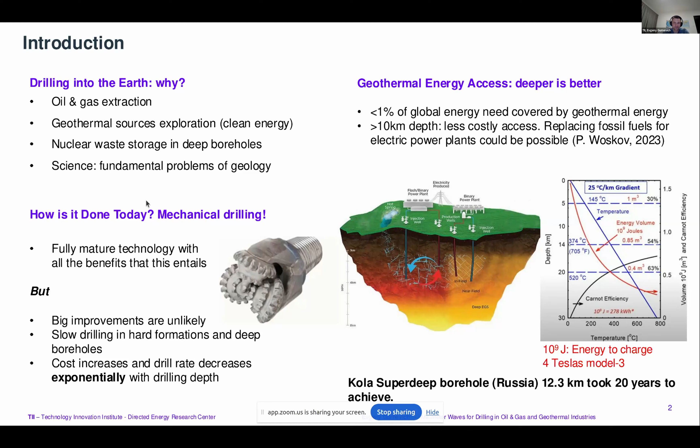One of the alternative technologies is millimeter wave drilling. Let's start from the basic physical principle. Millimeter waves are a part of the electromagnetic spectrum with frequencies, let's say, from 30 to 300 gigahertz. It has been experimentally shown that these waves are well absorbed in rocks, both granite and basalt, causing their strong heating up to the melting point and even evaporation. At the same time, unlike laser radiation, millimeter waves are weakly sensitive to the presence of dust in the air and can propagate with weak attenuation over long distances.

Additionally, taking into account the well-developed technological basis, here we need to say thank you to researchers working on thermonuclear fusion, because the most powerful millimeter wave sources are developed and used now for heating thermonuclear plasma.

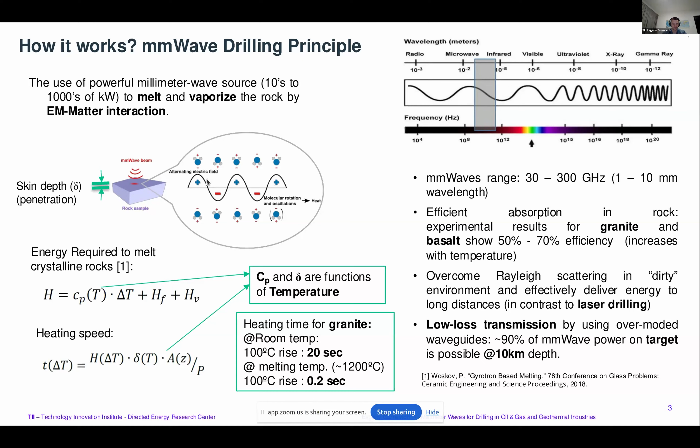So how are we going to apply millimeter waves to directed energy drilling? The general schematic looks simple. Also, there are many technical problems hidden behind it. One of the key components is the gyrotron. This is the source of high-power millimeter waves. And at the simplest level, a millimeter wave deep drilling system requires only one component in the wellbore, the waveguide, which has only vertical motion of advancement into the hole as it is deepened.

The gyrotron energy output and compressed gas are injected at the surface. The rock is melted, fractured, and vaporized by millimeter waves, and the dust and solid particles are supposed to be carried to the surface by the purge gas flow. The reaming of the borehole to a diameter larger than the central waveguide is facilitated by the natural divergence of the beam launched from the waveguide.

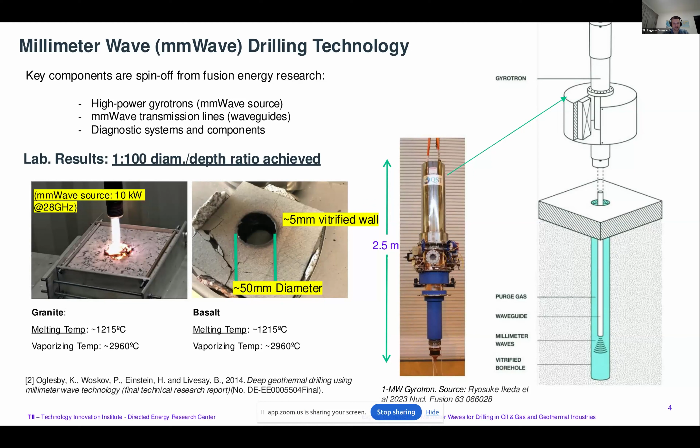I would like only to emphasize that the main advantages that are supposed to be for millimeter wave drilling are drill rate, the high drill rate that is supposed to be constant with depth, and drilling cost that should increase linearly with depth, not exponentially.

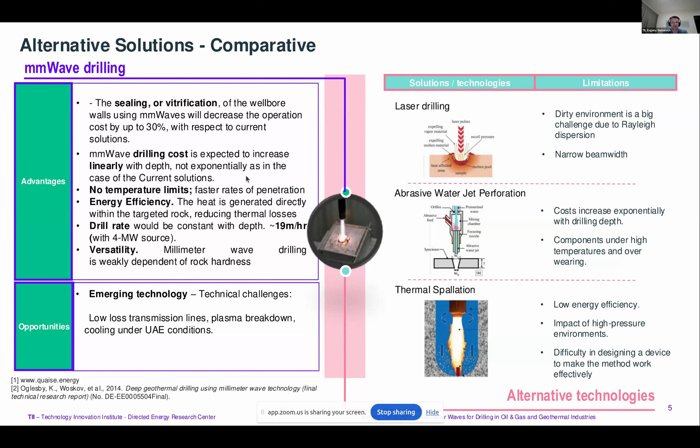So the advantages of millimeter wave drilling have led to significant investments in the development of this technology over the past 6 years. The key player here is Quaise Energy, founded in 2018. Its activities are based on the research of Professor Paul Woskov from Massachusetts Institute of Technology in the USA.

According to the open data, funding for the development of millimeter wave drilling in Quaise Energy currently amounts to about $107 million. And for example, among the investors in 2024 is such a well-known company as Mitsubishi. Currently, Quaise is building a complex for field demonstrations. The first stage is expected to be a hybrid drilling rig combining both conventional and millimeter wave drilling. And it is expected that this will be done in 2025, this year.

Here you can see some of their facilities, how they look inside, like gyrotron, transmission lines, sample chamber for testing the rock samples in the lab. I encourage you to visit and explore their website. If earlier in laboratory experiments drilling was demonstrated on small rock samples, then one of the last achievements, which was reported in 2024, is drilling a 2.5 meter deep hole in basalt.

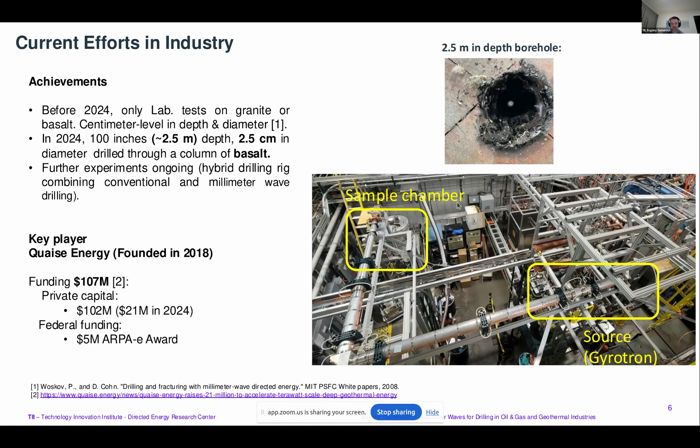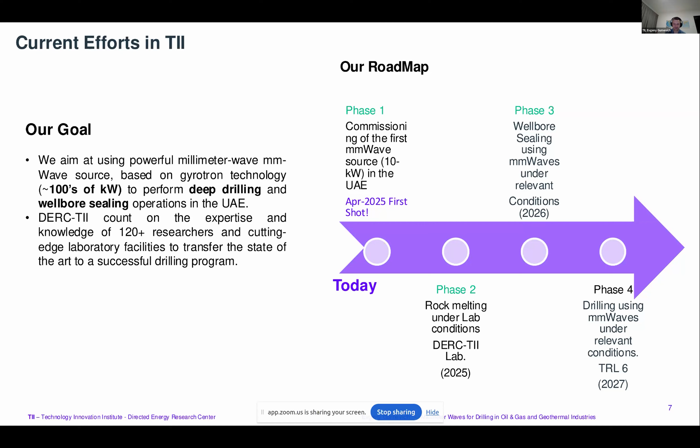Now let's move on to our first demonstration project in Directed Energy Research Center. The main goal of this project is to design the prototype to implement state-of-the-art knowledge in millimeter wave drilling technology to drill hard rocks. We plan to use gyrotron sources with power levels up to hundreds of kilowatts for this. But at the first step, that we are near to finish in the coming month, in April, we will use a 10 kilowatt, 28 gigahertz source, commercial gyrotron especially.

So this slide shows you what we are doing right now. We already have a gyrotron source on the left. It's not very high power, only 10 kilowatts, but it's enough to melt rocks in the lab. And it's supposed to be placed in a customized container in order to be mobile, which is needed for tests in the field. And the works are almost done for the chilling system for the gyrotron that can support operation in the desert in UAE conditions. And for the very first tests, we've designed a test chamber to study all needed millimeter wave drilling processes and technologies in lab conditions.

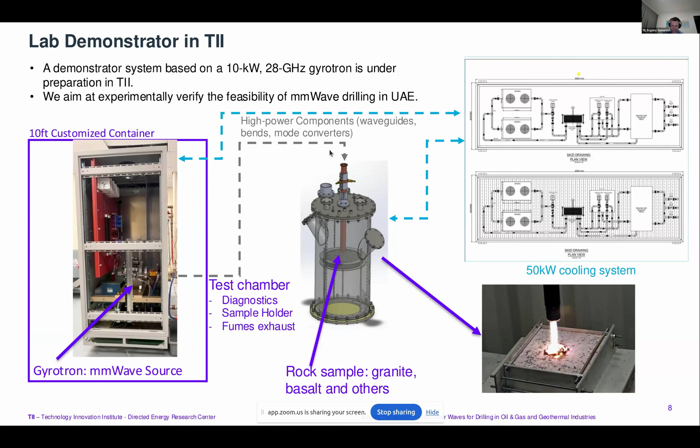Now we are finishing the design of the millimeter wave transmission line for our system. Some parts are ready now, as you can see in this slide. Some of them are in process of manufacturing, but we expect to do the first shot this April. Let me remind that the main goal of this project is to gain experience and clarify design parameters and tasks for the next stage, if we decide to go to it, for full-scale drilling.

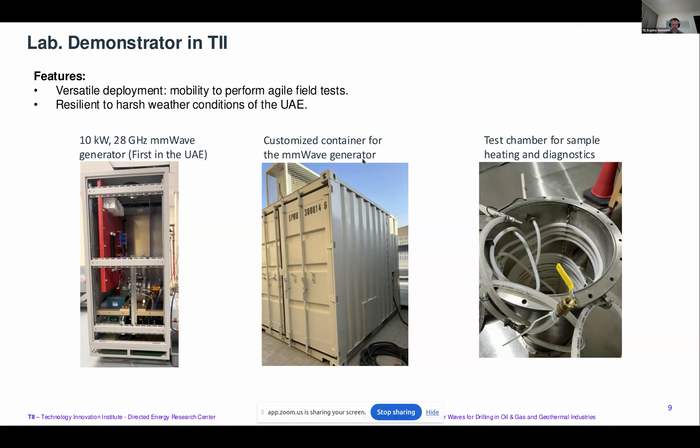Of course, achieving this goal implies completing related scientific tasks, developing effective transmission lines for the beam, effective mode converters, polarizers, and so on, and the determination of rock properties under intensive radiation and after irradiation. So, of course, today we are only in the very beginning of our project. This is not something that we finished or something that we can propose as a commercial product.

In the coming 2 or 3 months, we are commissioning the first millimeter wave source here in UAE, and now we are actively working on the design and manufacturing of transmission line components. The first tests are coming. We are excited to start this project together with, maybe to compete with, Quaise and other key players.